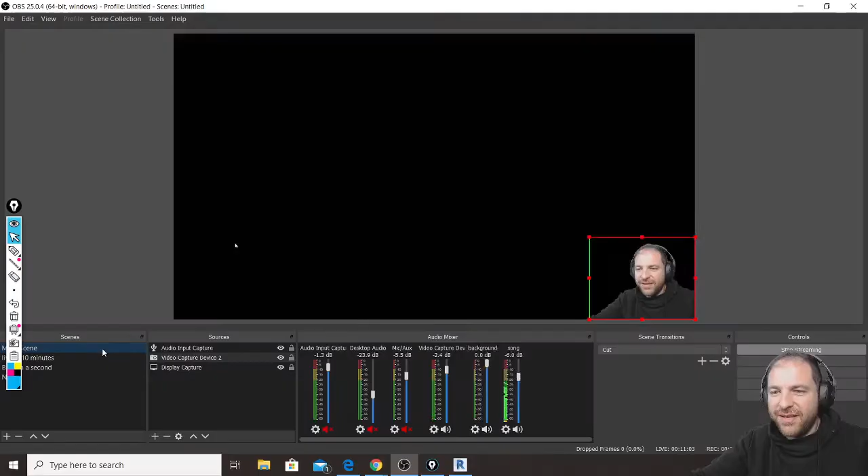Here I am. Let me see what you are telling about my new intro. Ooh, I completely forgot. No, I'm so sorry, Abhishek. At the end of the class, I will check your video. I completely forgot. I'm so sorry.

Cool, isn't it? Yes, I'm stepping up the live streaming thing, because I like it. I just like to play with these things. Also, someone said that other teachers were copying me with the good morning to everyone, and using also the live in 10 minutes. So I want to step up the competition, because then someone could say, "Look, Marco makes live in 10 minutes like other teachers." No. I have to be always a step forward.

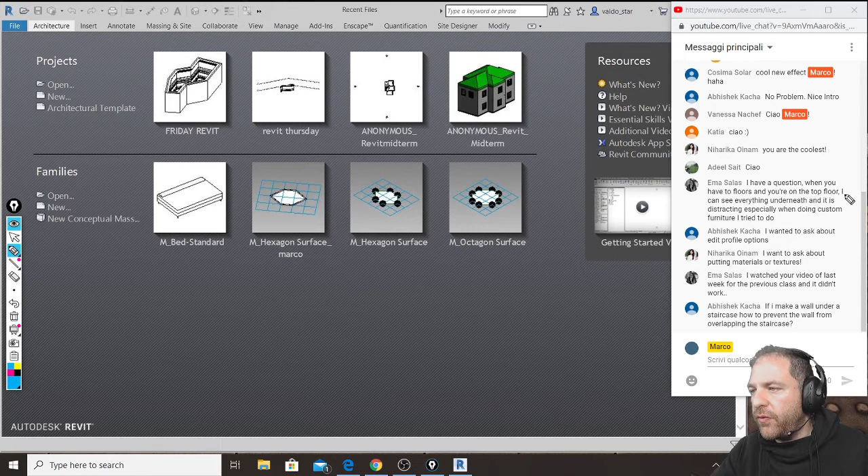When I have two floors and I'm on the top floor, I can see everything underneath and it is distracting. Okay, let's fix it. Let's open something that already has two floors to see why this is happening and how to fix this problem. Yes, it is about underlay.

So look here. When I go to level 1, the lower floor, and I go to hidden line, it is clearly visible that underneath this level there is nothing, because this is already the lower one. When I move my point of view to my upper level, level 2, in this case I can see these grayish lines that are telling me what is below.

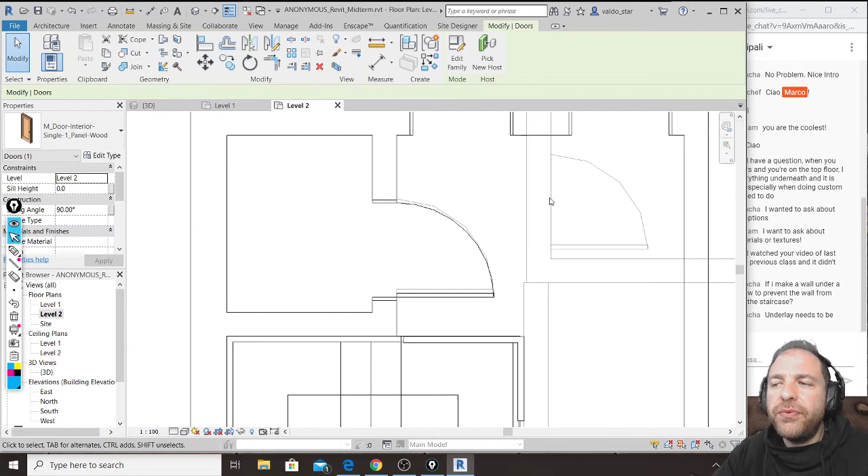This may be distracting. These should be used only to understand if you are precise in making your ground and your upper floor. This is anonymous; I changed the name because this was a midterm of one of your classmates, and you can see it is terribly wrong because a lot of things are not matching. But it is confusing, because in my upper floor there are not these walls, so I don't need to see them.

How to fix this problem is very simple. I have to be in the level where I don't want to see these things. I click outside, so I'm not selecting anything, and in the properties I see the properties of the floor plan view. I browse properties till I see underlay, and here underlay is level 1, so from level 2 I can see level 1. To avoid viewing what is underneath, I select base, I click none, and I click apply.

Boom! All those elements that were visible before are hidden, and you see only elements on your current level. When you want to show them again, you click level 1, look down, apply, and you see this. So I can use this to fix my door so that it perfectly matches in both levels. I click move till here, fantastic. Then underlay, none, apply, boom, it's gone.

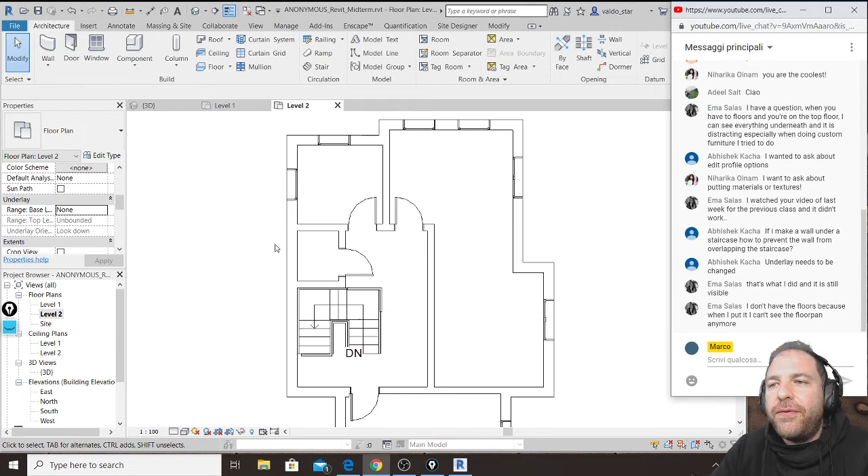But if you don't put the floor, you can change whatever you want in the underlay, but you will see things that are underneath because they are underneath. So what it means is that, look, if I make something here on level 1 and they are geometrically there, when I go to level 2, of course I will see these because they are there.

Come on. Hey, oops, exactly.

So, the underlay works when the structure is correctly done. When you have the floor that technically will cover this element, with underlay you can enable viewing in transparency, or disable it. But if there is no obstacle in between, there is no way to hide them. Okay? So this question is fixed.

Let's read them again. I want to ask you about edit profile, Abhishek. Then it says, if I make a wall under a staircase, how to prevent the wall from overlapping? No problem, Ema. How to prevent the wall from overlapping? This is an interesting question. So there are things that you can do.

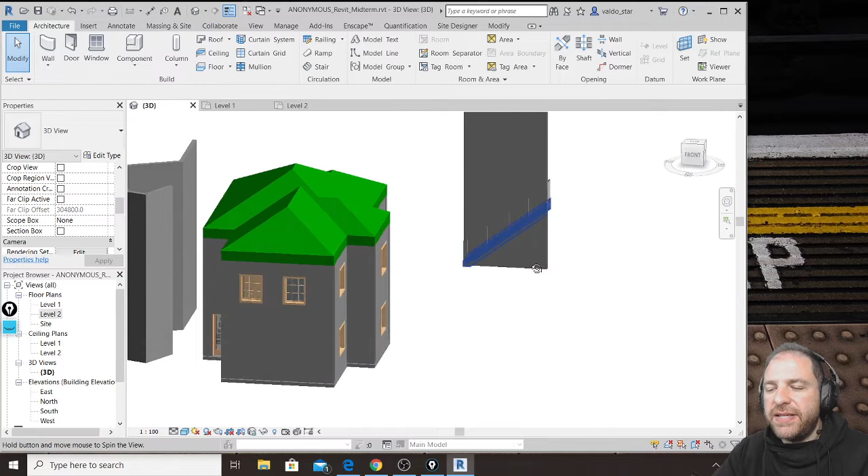So let's see this. Let's say I make a stair. I make this one. Perfect. And then if I go in here, let's say there is a wall in here. Like that. Perfect. And if I go in 3D, I will see that the wall and the stairs are clearly overlapping.

So first thing that I need to try is, this is an open structure staircase. So first thing, I will change the stair from assembled stair to something that is closed, like a precast or a monolithic stair. And this is the first thing that I can do.

Second thing that I can do, this is a try first, is I can click the wall, I can click attach top/base, I need to attach the top, and I need to see if Revit accepts the stair as an element that will shape my wall, and as you can see it doesn't, because when I click attach top/base, Revit will look only for floors or, how can I say, roof objects.

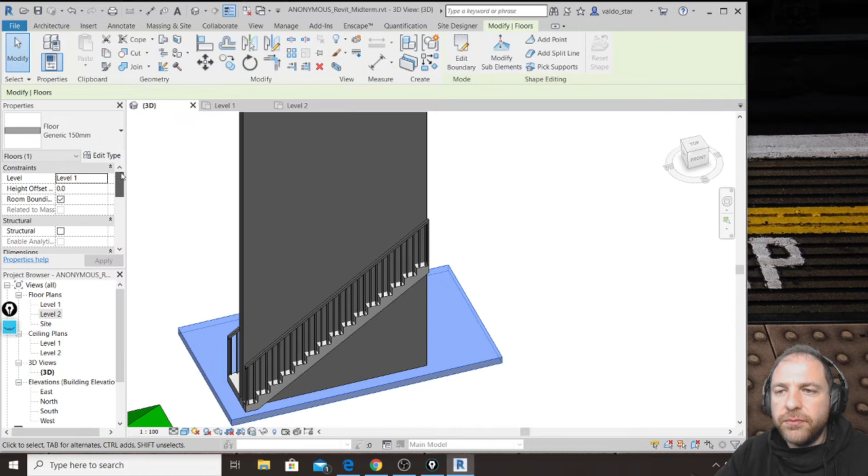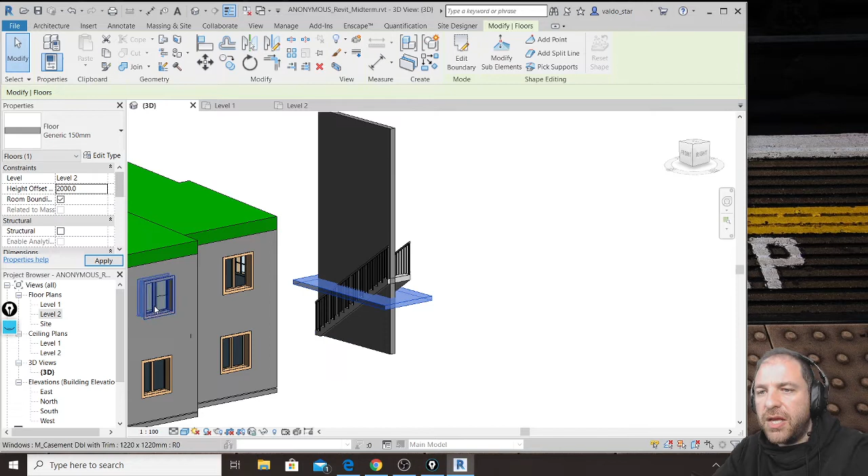Oh, wait a second. I mean, if I go here and I make a floor, just to show you, perfect. But in 3D, I will move this thing up, into the height offset. Let's say I type 2000, and it goes up. Then yes, I can select the wall, click attach top/base, and I can select this. So this is what we need to do.

We need to be able to create a cutting object that in this case should be a floor or a roof, but it has to be a cutting object that, wait a second, one by one, that matches the shape of the stairs.

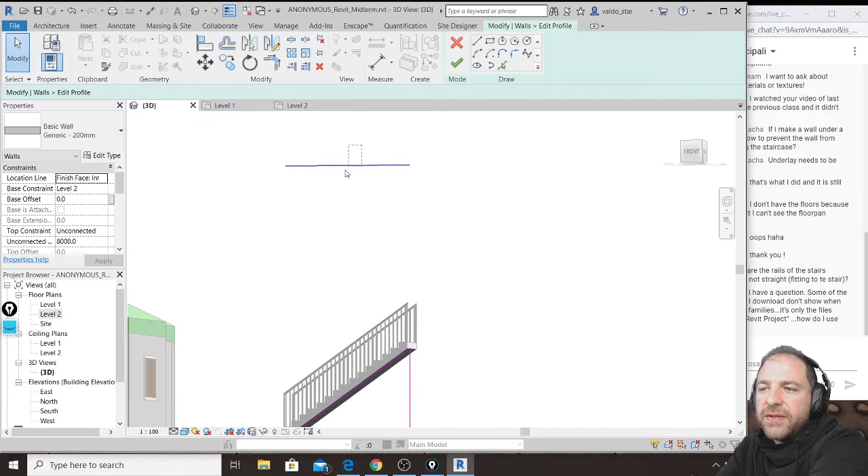Because if I am lazy, I can tell you, look, only if the staircase is just a simple ramp like that, without bothering with many other tools, you could select the wall, select edit profile, pick this line of your staircase and change the profile of your wall, cutting it like that, delete these extra lines, so you make a triangular wall, you click OK, and this is easy.

But if I explain this, I know for sure that someone will say, but Marco, what if my stairs is more complex? Okay, this is too easy. Let's see if I can show you something more complex. And then I will read Katia and Adil's questions. Let me finish this one. If my staircase is a little bit more complex, I can try to do something else.

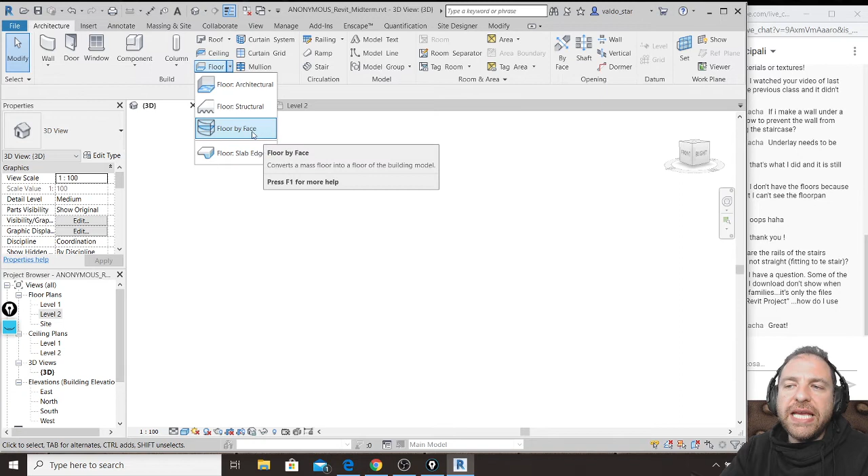If I know that a wall is cut by a floor or by a roof, I need also to know that the wall can be also cut by another wall in a slightly more complex way. That is this. Look. First of all, I can make a floor by face also. Technically, floor and roof can be made by face. So what this means is that if I have my stairs, let's make the stairs.

Wait a second. Let's go to level 1. Exactly. And let's make my stairs that are here. So I have this and then this. And I click OK. Again, the only thing that I will do is I will make these like monolithic stairs. So I change them from precast, I mean, just to have monolithic. That is here. Exactly. So that the structure is continuous.

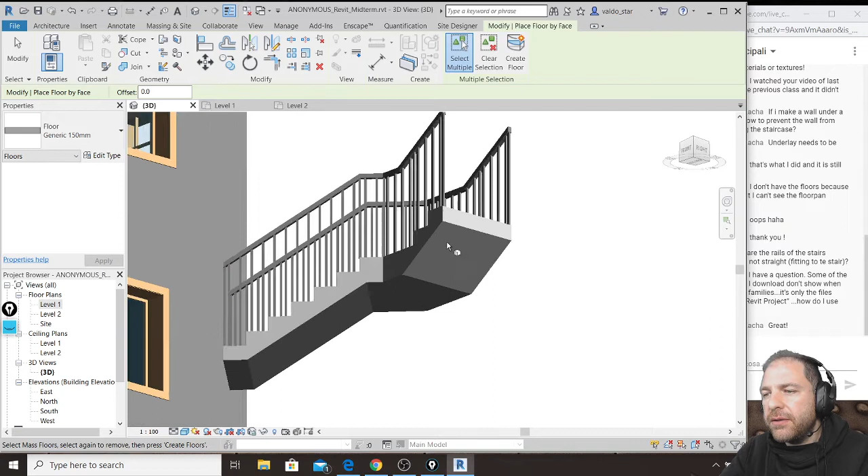What I can do is technically this. I can select floor. I can select floor by face. And I will pick, let's see if it allows me, I will pick this face. No, it doesn't. So I will use roof by face because the roof can be angled. Okay, multiple select. So I will pick. Why? I was too fast. Why it doesn't? Doesn't matter. Let's find the way that works for sure. So,

I want a wall that will be cut underneath this staircase. So look what I will do. I make a component and I make a component in place. Or first I make the roof, just to let you understand what we are going to do. So I have the wall in here. Perfect. And this will be impossible to be made with the technique that I showed you before. I mean, not impossible, but a little bit more annoying, because in here, in there, it will take forever. So, see this phenomenal thing.

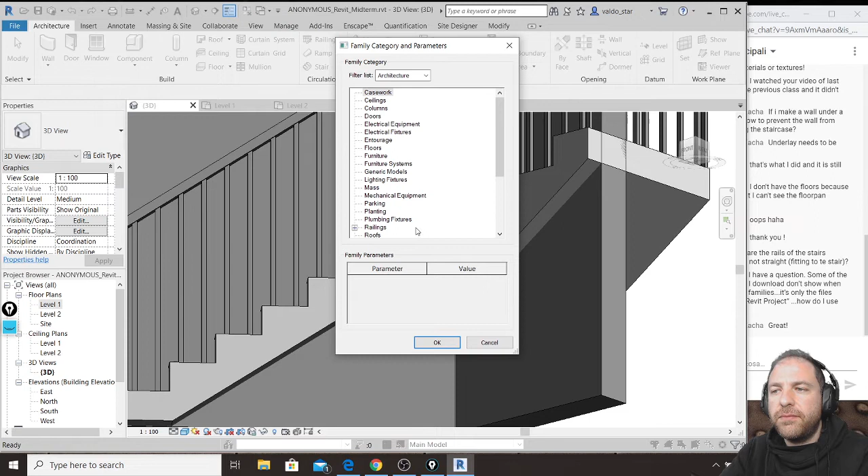What I have to do instead is I will make a component, and I will make a component in place. And it will be a wall. Okay, wall 1. And I will make a shape that is the projection of the profile that I want to cut. So, even if this is angled, what I will do is I will make a reference plane in here. And I will call it whatever name, like Marco. Okay. Then I go to create, but I will create a void extrusion. I will set my working plane as the plane that is called Marco.

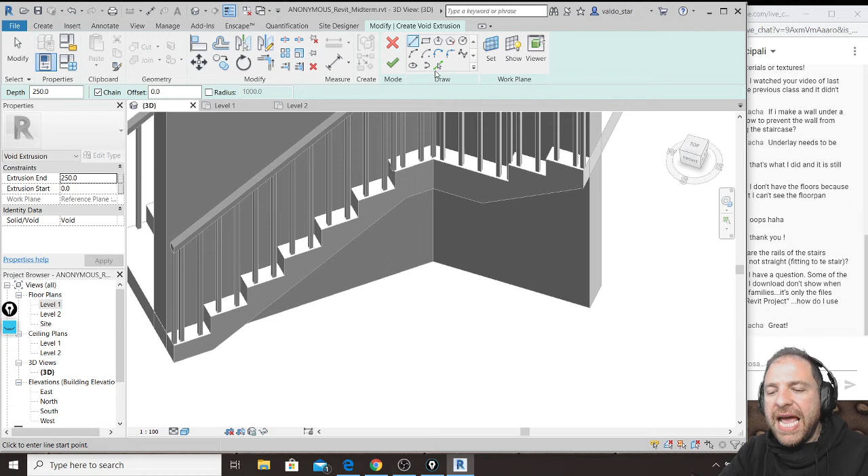Okay, I will go to the 3D view and I will start drawing a shape by projecting these lines that are edges of my staircase. Maybe this one too. Yes, they overlap. It's okay. So I will start from this shape here, but I will make it better. I will make it continuous. So I will trim these with that. And I will remove these overlapping lines, because if not, Revit won't leave me alone.

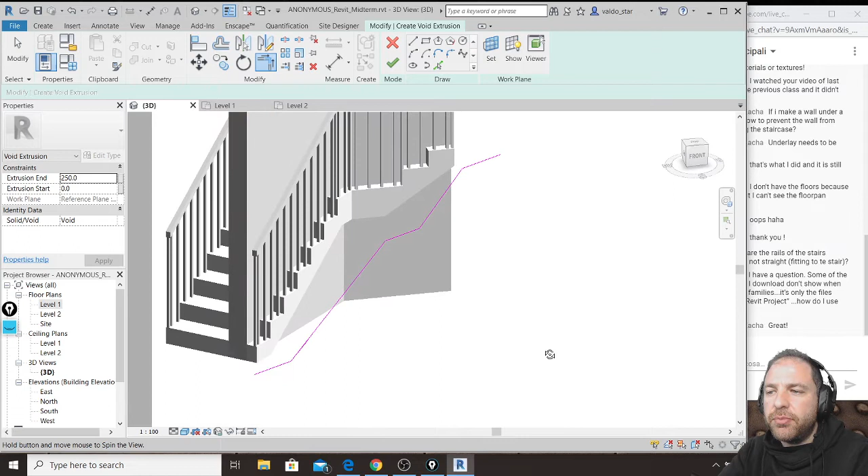Okay. I will trim these with these, this with this with that. I remove this one because it's a duplicate, and I will trim this with this. So I have the lower profile of my beautiful staircase projected here. I will simply complete this shape by making it taller, because this wall is gigantic, like that. Perfect. And I will close this.

I will finish my void extrusion. Lines cannot intersect. Where are they intersecting? Ooh, there is a line there. Yes, this is my fault, sorry. So again. Okay, so finish these. I will extrude this void extrusion so that the void extrusion is thicker than the entire wall, but I get this cut.

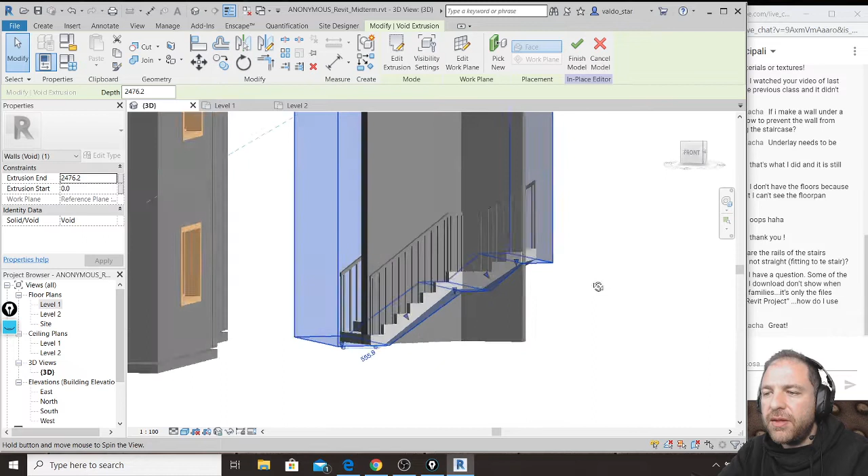And before finishing this operation, so before clicking finish model, what I do is I click into my modify, I click cut, I select first the wall that I want to keep, so these, cut these, and then this. Boom. Oh, I forgot. I should make a copy. Wait. Because there are two walls that I want to cut, but you have already seen the surprise. So I just copy these twice, because I want to cut both walls.

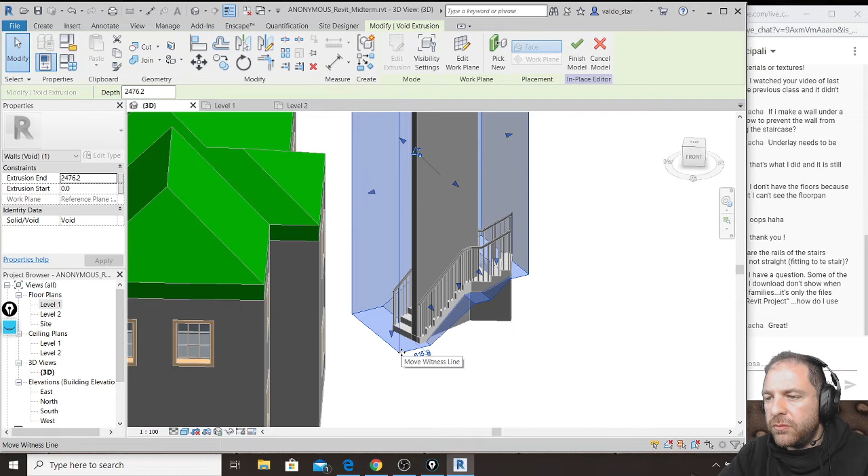So I set a working plane, level 1, set level 1 exactly, and I copy this. Okay, I should copy with a known value, so that then I will move it back. So I click cut, select first wall and first void extrusion. Then I move these back where it was. Was probably here. And then I click cut, select the wall that I want to keep, and I subtract it with this solid, and boom!

I finish the model and I have this phenomenal result that I have the wall cut in order to stay perfectly underneath the staircase. So it's basically like in 3ds Max we would have used ProBoolean, and we have used like subtraction with ProBoolean. Okay?

Oh, thank you so much. So

Let's see this. Why are the rails of the stairs sometimes not straight? This is very complex. It requires me to think about it. So let's see. I have a question. Some of the blocks that are downloaded don't show when I'm loading a family.

Okay, let's see this. First of all, when you download objects, you need to understand which category of objects you are downloading, because when you download, let's say, an object that is a Revit family, that Revit family can be different things. What it means: if you download a family that is about furniture, you will be able to load it only if you go to Architecture, Component, and you click Load Family from here.

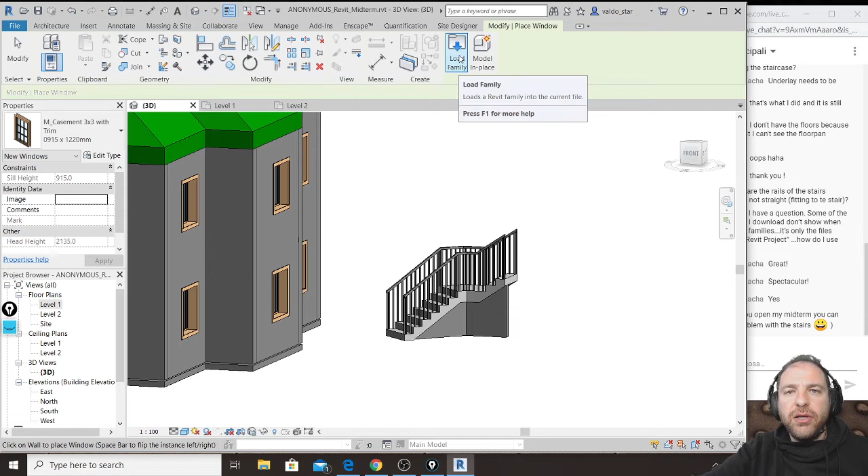But if you have downloaded a family and the family is about a window, you must select Window first and then click Load Family. Because if not, even if you have just downloaded it, if your family is about a window, you can't load it from Component, or if you have downloaded a door or stuff like that. So first of all, check which kind of family you have downloaded, and if instead it says it's only Autodesk Revit Project, it means that you have downloaded an entire project that is not a family.

So it is a project like this, and if you need to use a component from a project, you have to double click on it so that you open just that component. You go to File, you save as your family and not the project. So just this family, in this case it is a window. Okay. And you will save just this window as RFA, that is Revit family and not Revit project. So then you can use just this component inside another project. Okay? And this was for Adeel's question.

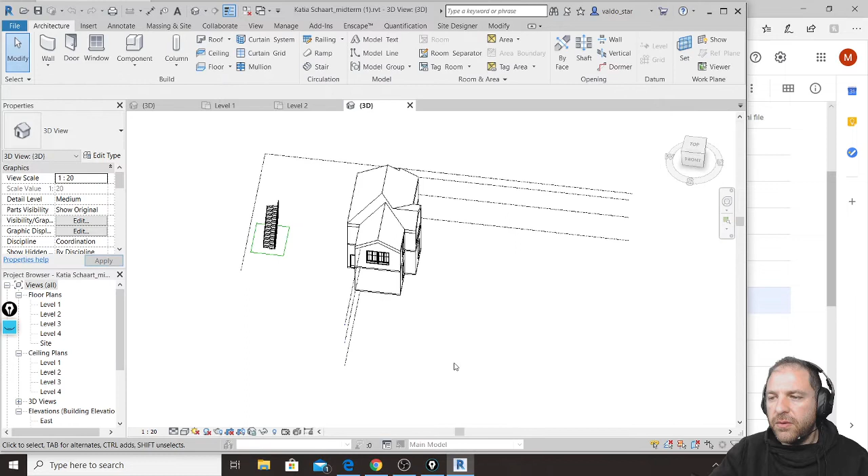So Katia gives us the permission to open her phenomenal Revit midterm. So Katia, download. Let's see. Okay, so let's go to level 1. Why do you say that your rails are not straight? Where? They look perfect. If you open my midterm, you can see the problem with stairs. I am opening your midterm. The one in the green square in the 3D. So the 3D.

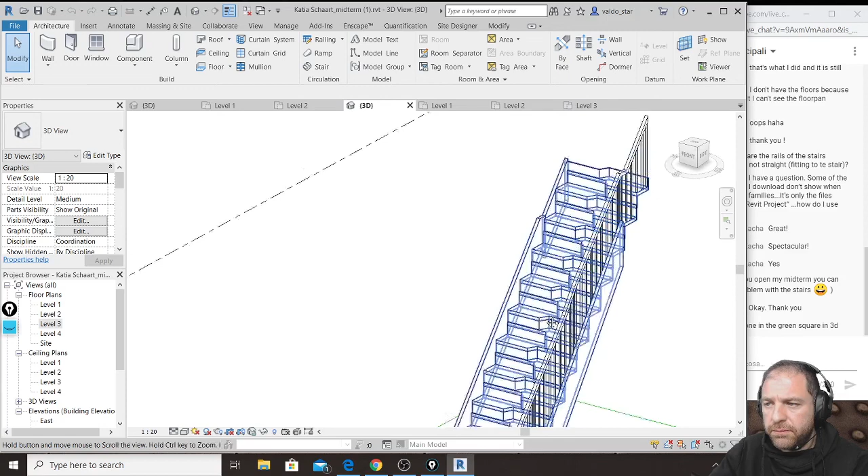You probably mean this part here. Why is this not linear and with this particular broken shape? Is this it? I don't know, I have to see. I don't know why it's like that. Let me check. So let's delete the railing first. Yes, but I can see that it is broken here. So let me double click the stair. Edit the sketch. Go to level 1. No, level 1 here. And understand what is happening here.

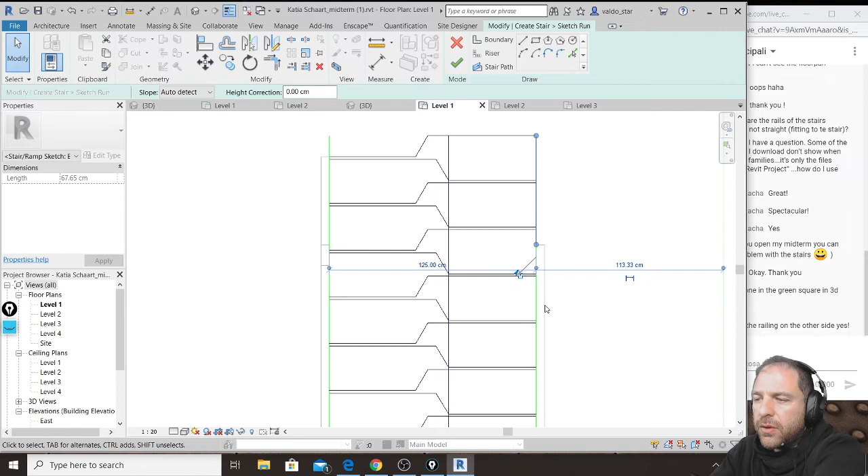So, the question is, why have you made the boundaries of the stairs with these separate lines instead of making them with one continuous line? As you can see, the boundaries of your stair are this green line. Okay? So sorry if this hurts, but I will make these with one continuous line. Okay, let's see if it fixes. No way! Now I go to 3D. Woohoo! And everything works. Unbelievable, isn't it? Marco 1, Revit 0.

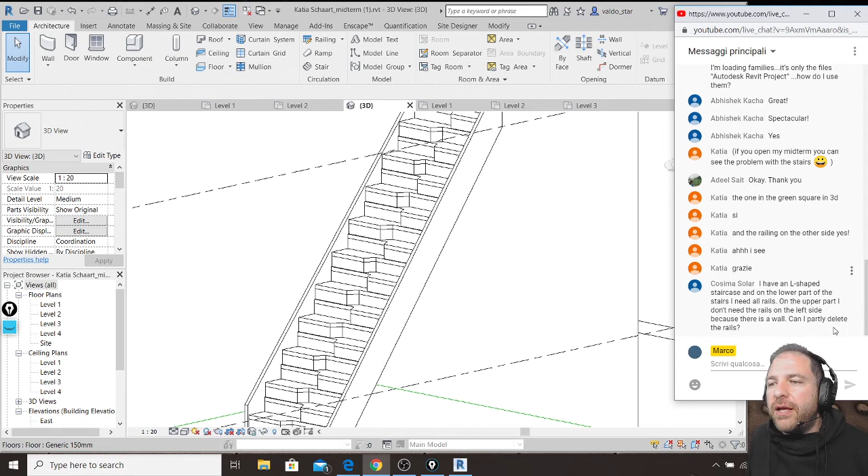I mean, this is challenging. Like, you wake up one morning with an idea in your mind to make a class, and then questions are drifting in completely unexpected directions.

So, let me see. I have an L-shaped staircase. On the lower part of the stairs I need all rails. On the upper part, I don't need the rails on the left side because there is a wall. Can I partly... okay. So, first of all, let me close these, because if not, people will say, Marco, fixing files and whatever. So, let's start from a new one, just an architectural template. So, your classmate is asking this.

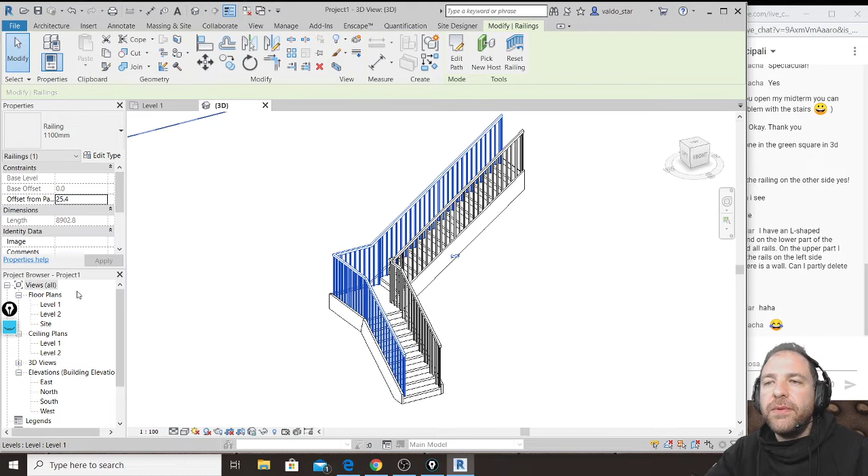She has an L-shaped stair, so something that should look, let's say, like this. And when we create this staircase, it happens that by default the railing is placed all along the host, that is our staircase. And if we try to delete this one, we will delete the entire rail, while your classmate is saying, wait, in here I'm going to have a wall. So probably like this.

So let's say here I have my building that looks like this. So I need railings here till there, and then I just want to remove this part that is matching the position of the wall. First of all, is this the problem that you have? Let's see the answer. So we want to get rid of it. Perfect. So let's see how to fix it. It's not that hard. Way number one, let's see if it works in one click. I mean, this is an experiment in real time.

You can try to click Split Element, split it here, and then boom, it's done. And so sorry, was this fast? You want to see it again? Because I mean, it was too cool.

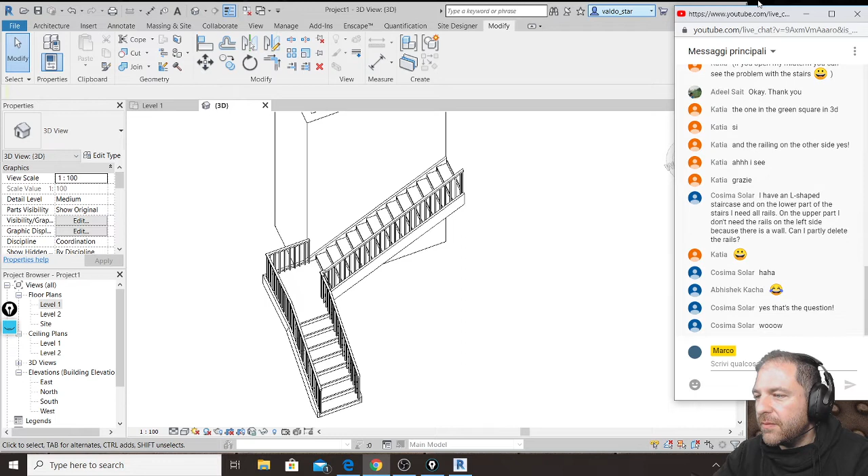I know, and it's beautiful.

So technically what I have done is simply use split, that tiny tool in here. When you have a continuous object, in general you break the continuity of this object, and this is a lot more useful than we think. For example, even when we just make lines, so I'm just drawing lines, and I make a rectangle.

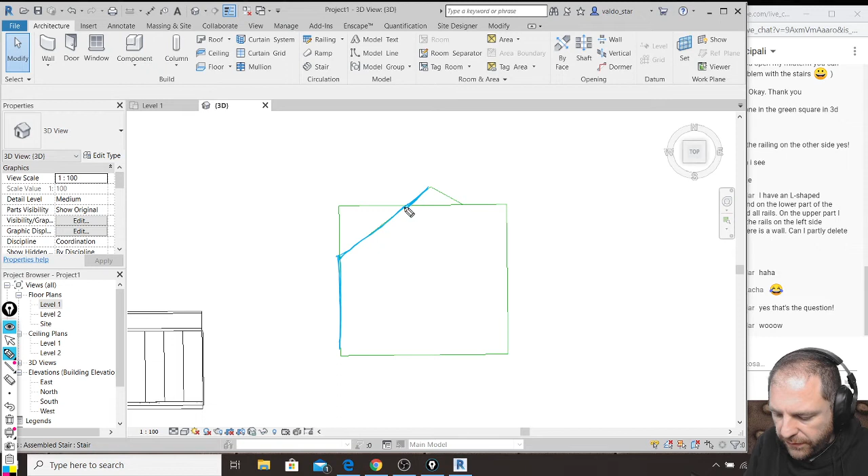If I want to do this, so in AutoCAD it is very simple, let me sketch on top of these. In AutoCAD, if I make these two overlapping shapes, then it takes one second by using trim to turn this shape into something, let's say, like this. Or not even, no, sorry, into something that is like that. Because in AutoCAD you select trim, you trim these, and you are done.

In Revit it looks like it takes forever, because if you use modify and you use trim, since this is one line, if I trim this with that, it trims those elements. But in reality, I wanted to keep this part in here, while I wanted to delete this part of the lower one. So look why split is so useful.

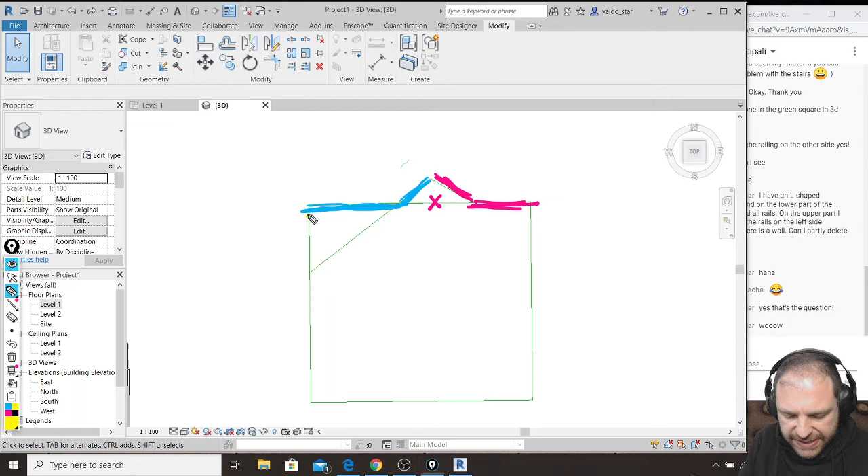Because in reality, in here, I will use two colors to let you understand, we want to make this part trim with that, and we want this trim with these. What I have to use to make my life easier is I have to split this continuous line. By using split, I will tell Revit that even if it was one continuous object, with split you need to treat these as two independent elements. It's like adding a vertex along our shape. So I click split first, so that I add that vertex, and then I can trim this with that, this with this. Okay? This is exactly the same thing that I have done into the railing.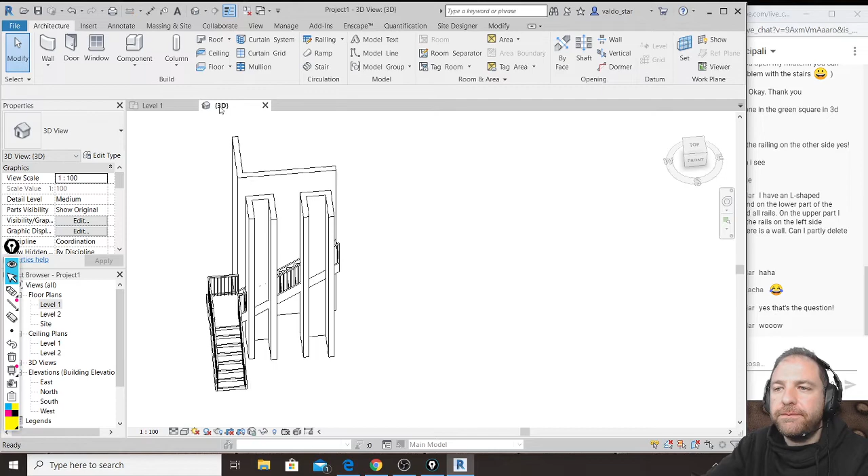So, if in my project, look, even if it would be a little bit weird, but if for some reason I have walls that are going like that, and the railing is overlapping those walls, the result is terrifying, I will say. What I have to do is only select my railing, split it, and split it in each point where I want to break its continuity. I can even split in more points, but in this way, boom, I will just remove certain parts. It worked. Perfect, I am super happy.

Yes, it's okay. So, one of the things I wanted to show you today is something I have already shown you from the question of your classmate. I wanted to show you that in Revit you can not only use join when elements are not perfectly combined together, but you can also use cut. The thing is that by using cut you need to make void shapes, and this is pretty interesting, and believe it or not, it is sometimes a lot more useful than you may think. I want to show you one particular case, an example of using cut in practice.

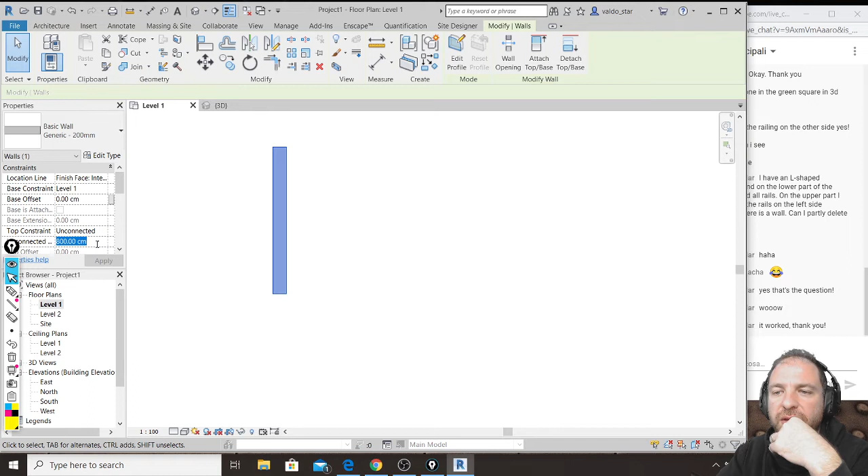So not just weird things or just the wall underneath the stair, but sometimes we may experience this. Look, I make my wall, and sorry, I forgot, sometimes I would change it, but I just like to work in centimeters for no reason, I just don't like all those numbers when you work in millimeters. Okay, and this would be like 800 centimeters tall, just a wall. And I want to place a very common window, so I will put my window here.

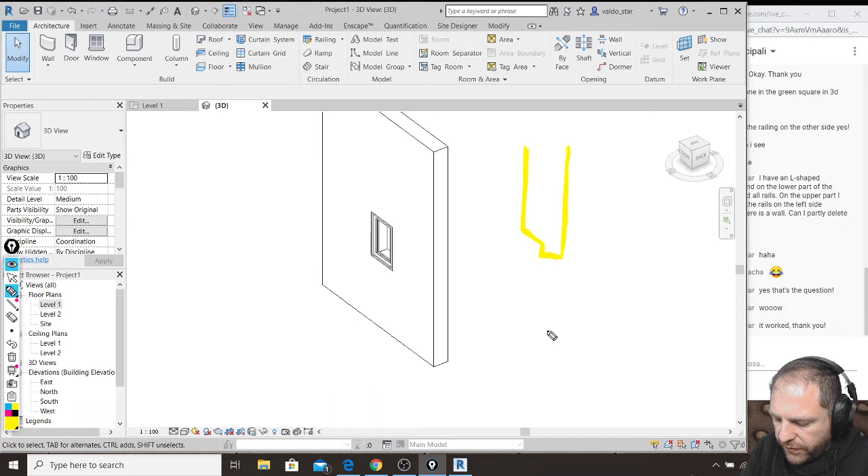I am super happy with the result, but then I can see something that I honestly don't like. This window is placed in a way that the hole in my wall is rectangular. Especially in Italy, I would say, but I don't think only in Italy, in old buildings it happens a lot of times that when you make a floor plan of a house, you may notice that the wall is not continuously thick, but the wall makes this first, and then you have your window here. Like this. Okay?

And the thing that I have instead now in Revit is I have my wall, and by using that window, the result is that I have something like this. I have this huge, deep frame, and the frame then has this tiny window here, and I am having this. Sometimes this is not what we want, and we need to create this particularly shaped wall. So how to do this? This is not that simple, unless you know that, as I showed you before, you can make basically pro-Boolean operations with your Revit just by using component in place.

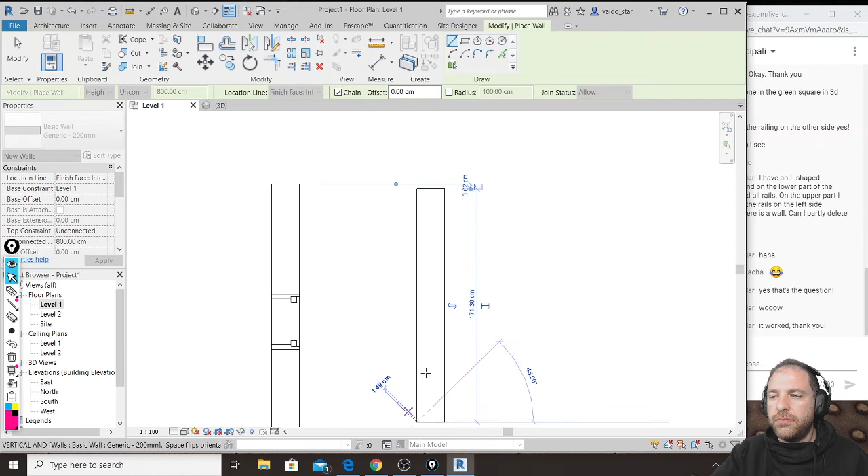So, if you have that specific problem, you should start in this way. That is, you make a wall, and then you go to Architecture, Component, Model in Place, and you click Wall, and you click OK. You call it as you wish, and then there are multiple ways to do it. Technically, a more precise way will be by using blend. So look, I make a plane, let's say here, and I will call this middle.

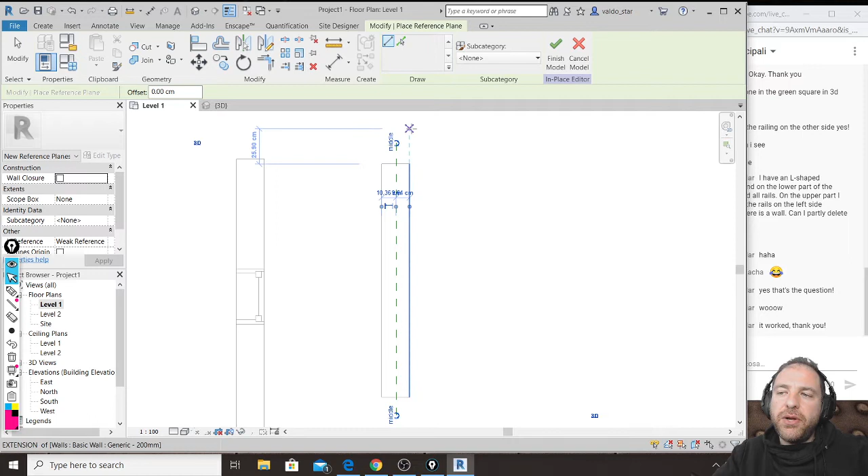You may ask why I'm not also creating a plane in front of the face. It's because of another new thing I want to show you today: when you have planar faces, you can pick those existing planar faces to draw on.

So if I go to my 3D view, I can immediately go to Create, go to Blend, and as a first face I click Set. Instead of choosing a plane by name, I can pick a plane, click OK, and pick this existing planar face to draw a rectangle.

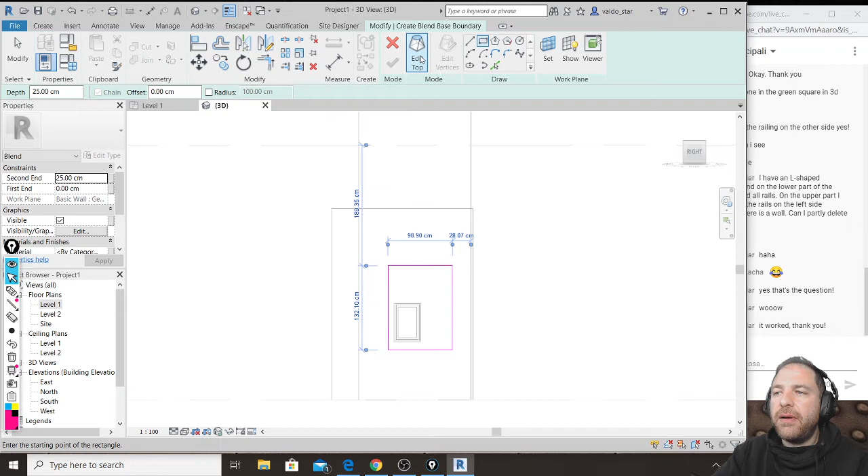Then I'll draw another shape, but I want to see it in transparency, so I go to wireframe. When I click edit the top, I set that my next plane must be the one I've called the middle one. As a second shape, I simply draw another rectangle like this.

I can also start both rectangles from the ground, which would be even more realistic. So I go back to the base, and now I have these two rectangles, one into the face of the wall, one in the middle.

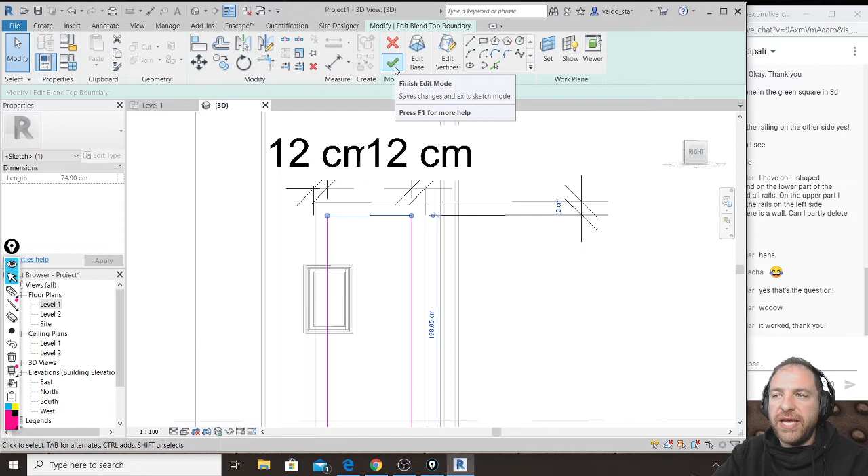If you want, you can be more precise when you make these shapes, so they're equally spaced. Set the distance here, let's say 12. The distance here is 13, so you click it and make it 12. You click this one and it's already 12. You can also do this from the top, select these and make it 12, so there's a perfect equal space in between. Then click OK, and this is the shape you've created.

These must go in the opposite direction. It has to go inside the wall.

Before closing my model, I'll click Cut. I select the wall first, and this second element. Wait, don't tell me I haven't clicked void. Sorry, this is my bad. I've explained it before, I have to make a void blend like I made a void extrusion before. This is 100% my fault, so forget what I said, but I'll do the same thing.

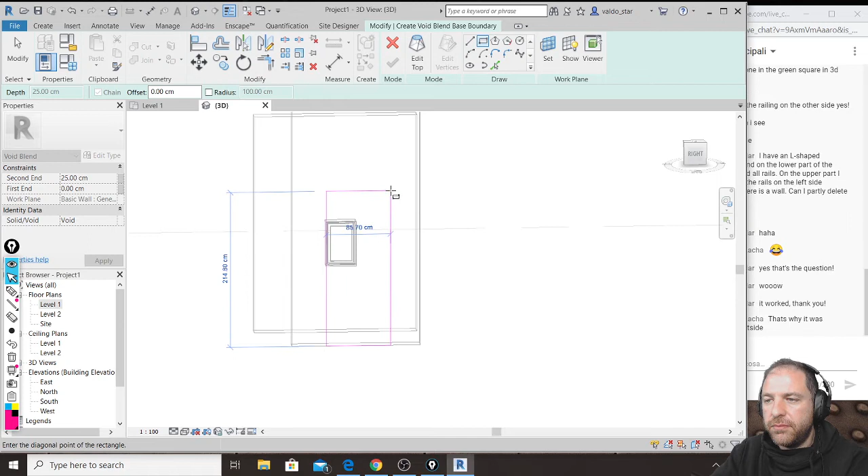So I click edit the top, and set to pick a plane. Sorry, I haven't clicked void. And I make a rectangle. Exactly, I'm so sorry, I haven't clicked void, it's 100% my fault. Then I click edit the top, set as the middle plane, and make my second rectangle. What a basic mistake.

Again, if you want, you can be a bit more precise. I set these to 12, this to 12, this to 12. Click finish, and this will be a void blend that has to go to my plane here.

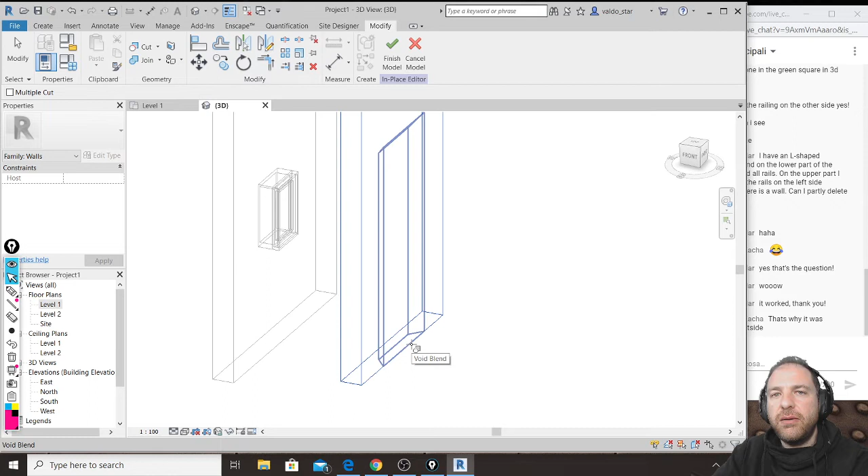Now I can click cut, and I select the wall first and my void blend, then yes. I can finish the model, and go back to my hidden line view, and bim, bada boom, I have basically carved the wall in this way.

Then I can add windows. I can even edit the profile of my wall, and place a rectangle here that would be perfect like that. Edit the profile, making it a little bit taller, and I can really start by creating whatever I want in Revit, not limited to objects I find in my library, but free to model elements exactly as I need.

Just to show you, you can also combine objects together by using join, something we've seen in the section where the floor and wall overlap each other. You make join and fuse them together. But you can also use cut, though that only works if your objects are hollow or void forms, so they must be made like void shapes.

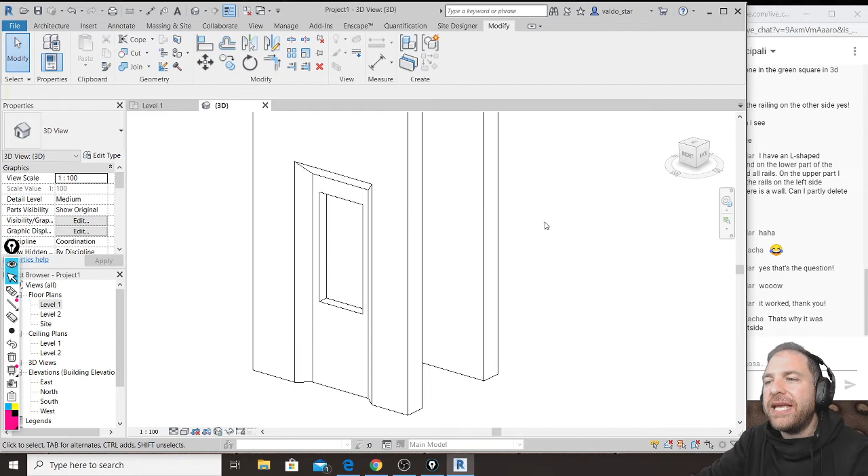That was the first thing I wanted to show you today. But there's something more interesting I want to show you that is still about modeling in place. When you make models, you need to understand that modeling in place is perfect when you make a component that you know you will use only in that particular file.

Because if I make this void thing here, or if I draw a table using a model in place, then I can't use it, I can't load it into another file.

So, where is the deal? What you can do by using the same tools, just starting from a slightly different point of view, will be this.

In Revit, look, just to show you again, when you click Model in Place, can you see that you can create all of these kinds of objects? You can make ceilings, columns, doors, electrical, floors, furniture, generic mass, mechanical, planting, blah blah blah. But they will stay in this particular project.

But see this unbelievable thing. When you go to File and click New, in Revit you can click Make a New Family. What is this? It's very simple, and if you make a new family, you need to start from a template, and the template will be a family template.

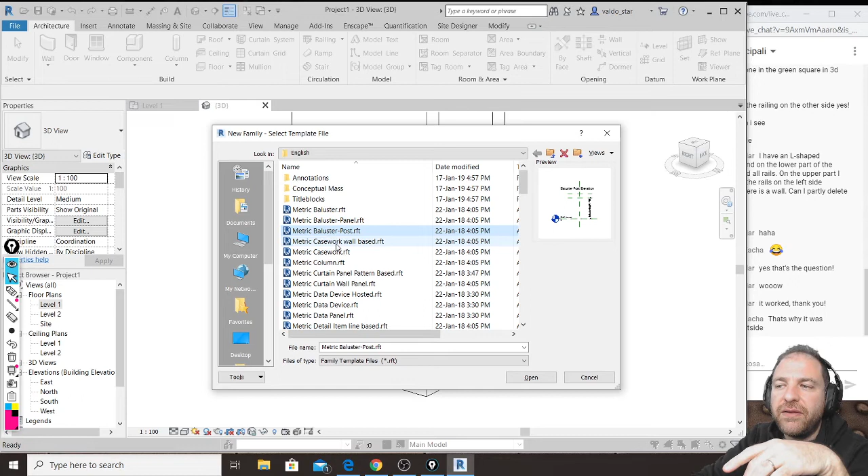So you can see that you basically find the same exact names, so you can create columns, curtain wall, doors for curtain wall. You can make even more things, because here there are also construction and systems templates. But if I want to make furniture, I will start my template as metric furniture.

If I want to make a roof, I will select... if I find it, there should be roof somewhere, I don't know where. Here, roof: model roof based, floor based, wall based, or just a generic model that is not in a particular category. But let's say I want to make a furniture.

So I start by making a new family with furniture template. But why? Simply because if I start in this way, I will start a completely new independent file.

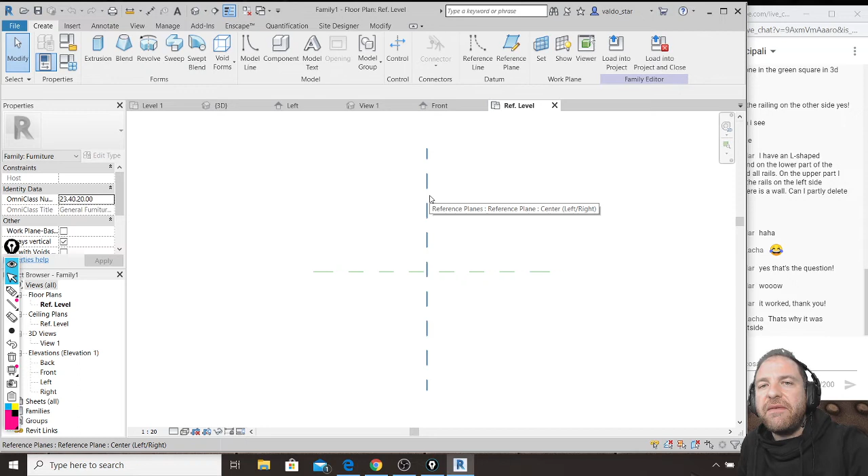This file will basically start by having only 3 planes, that are this one, and now we are on that, but there is also this one. So basically this is an empty file that starts by having top, front, and left plane, and I can not only, as you can see, reuse the same exact tools that I was using in Model in Place.

But the very big difference in starting a new family is that when I finish, I won't simply keep this model in a certain project, but when I save this family, I will save it as a file. I can place it in my library folder, and I can load it from whatever project I am creating.

So let's say I will do something that would be unbelievable. That is, I want to make a very basic table. But not only do I want to make a table, I want to make something more complex. That is, I want to make it parametric. And this will blow your mind.

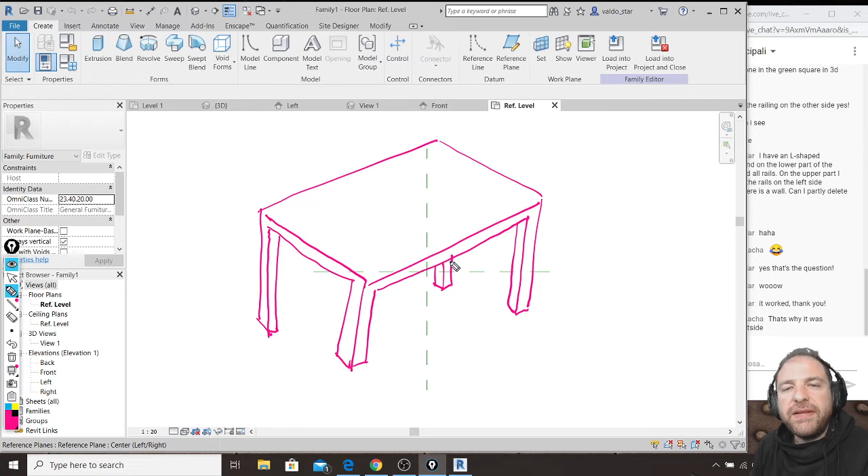But there is a twist in here. That is, I don't want to make one table. That would be too boring. I want to make a family of tables, so that I will have the possibility of choosing inside the project that I can have the table.

That would be a square, or the table that would be super long, or the one that would be shorter, and so on and so on.

So I want to make one file where I find a family, a family of tables. And the concept that is behind this, I hope we will finish it today. If not, there is time. The concept is basically this.

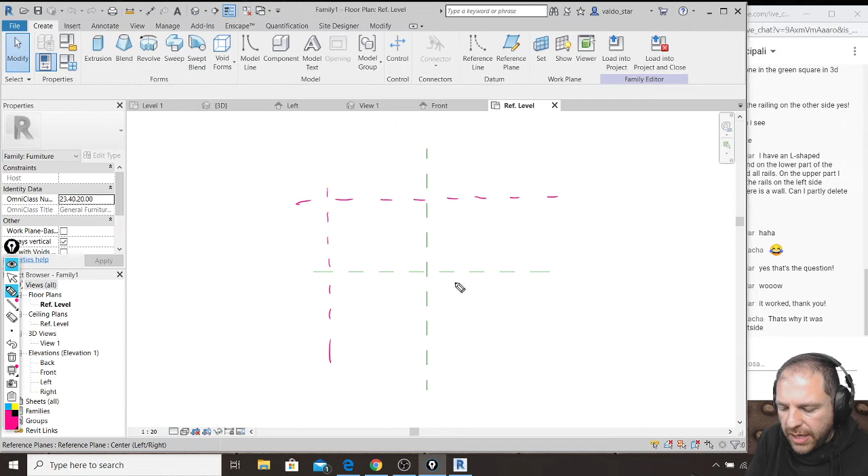Instead of just drawing and modeling our object, what we have to do is create a structure of reference planes, and we will give dimensions to our planes, and we will say that this won't be a dimension, but this would be a parameter, and let's say we will call this length, and we will call this width.

And then we will say that the table we draw must have edges stuck to these planes. So in this way, when we move our planes, in reality, we will stretch the table. So this is the concept behind making a parametric furniture.

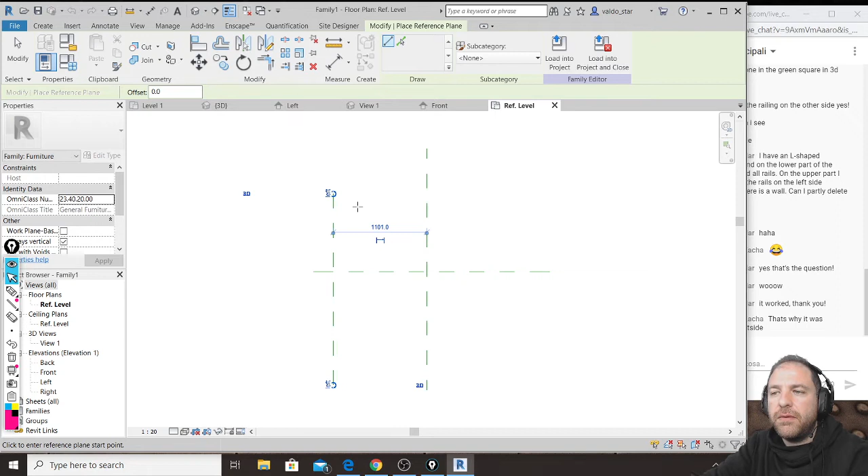So look, I will simply start by making this plane, and I will call it left. I will make this plane, and I will call it probably right. I will make this one, and I will call it back.

I will make this one, and I will start by calling it front. This is the center, and so on and so on. So what I will do next is I will use aligned dimension to be sure that the axis that is into the center is there.

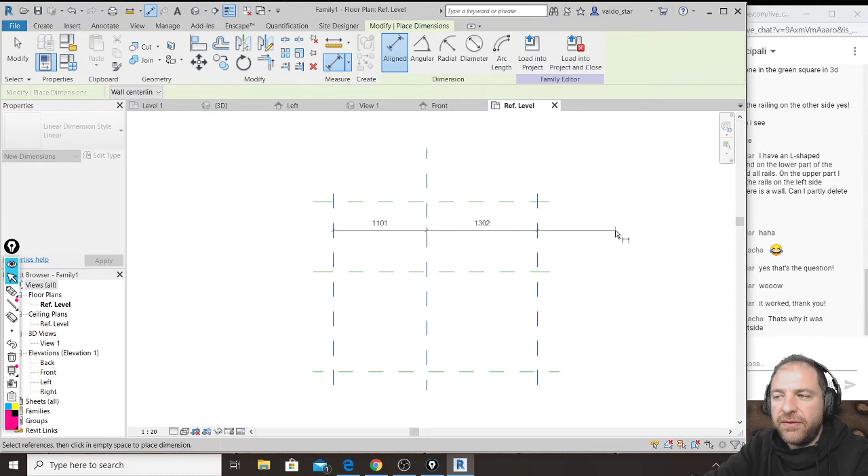So I measure. I measure from my left to the center to the right, and I click outside. And I will simply set that they must be equal. In this way, when I move one of them, they will both move closer or further from the center.

I will do same thing for the front and the back. So I use aligned dimension: back, center, front, outside, and I click equal. So then again, in this way, when this parameter will change, both sides will keep the center where it is, but both sides will be stretched. Okay?

I have almost done. I need then to add instead another dimension so that I measure directly from left to right. And this will be my length. From back to the front, this will be the width.

Okay? And I will do something phenomenal, that is, I will select my dimension and, by selecting the dimension, I will click here when it appears label, and I click create parameter next to label. And I will call this parameter with the name that I want. So for me, we said this is length. Okay?

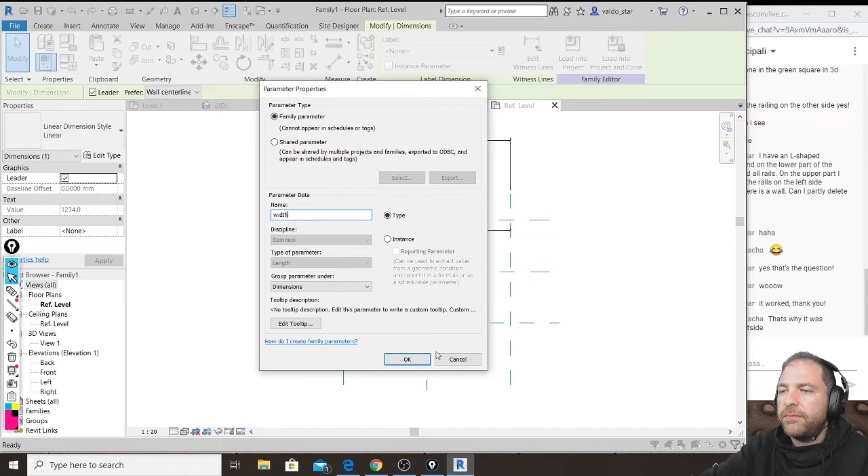Till here? Yes? No? Maybe? Tell me if also here...

I've made the mistake because I called it length while no. And how can I modify it now? What is here? Give me a second because I need to find where is the name of my parameter. Here. It's called length. No. Here. Edit parameter. Exactly. Sorry. Length. Okay, sorry, this was my bad.

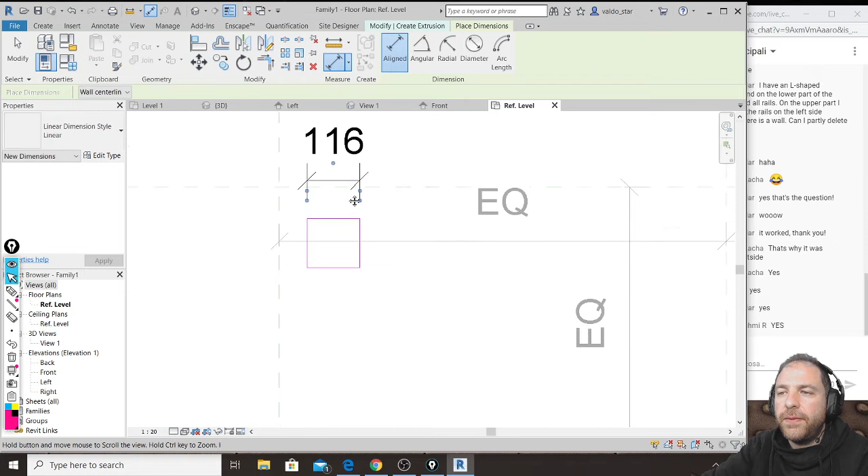So now this is just the beginning. And now we have to see something unreal. Look, I will quickly start by creating an extrusion. And I will make the extrusion by making a rectangle. And I will start by adding dimensions to this. So I will say from here to here. Units are millimeters again.

Yes. So I will say that this will be 100. Perfect. But then I will lock it. Then I will do the same in here. I select these, change the number, 100, perfect, select it, lock it. In this way, these will never change size, but I will do something even more phenomenal.

That is, now I will copy, or I can mirror it. I mean, it's the same. And I will make multiple copies. I will copy one here, one here, one there, so that I have 4 legs of my table. And what I want is that when I change my size of the table, of course legs must follow the adjustments.

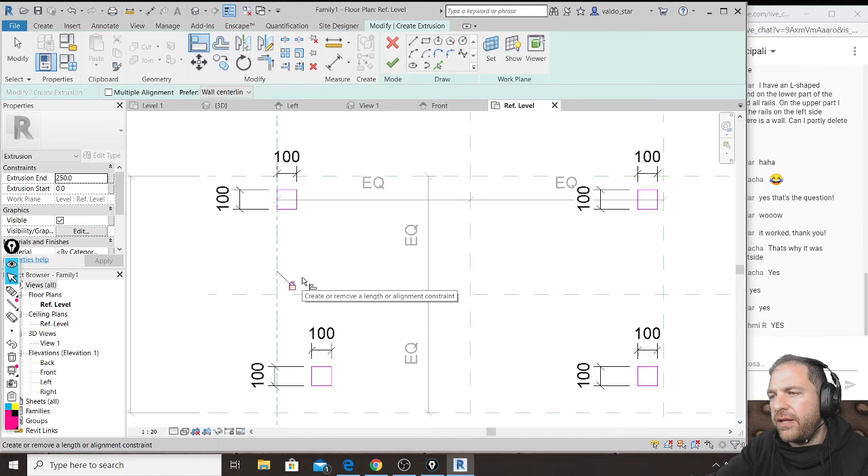So what I will do is, see, because this is too cool, I click Align and I will select the plane first and the face of the leg, and I will lock this alignment. And it is tedious, I mean, it is a bit repetitive, but if you do it right, it is amazing. I keep aligning this plane with this face, and I lock this alignment.

And I repeat this for all exterior faces of the drawing of table legs. So align first the plane, then the line, lock it. Align first the plane, then the drawing, lock it. Align first the plane, the leg, lock it. Plane, leg, lock, plane, leg, lock, plane, leg, lock.

Then I can click OK, and I can give the height that I want for table legs, let's say 700 millimeters, apply. And if I go in 3D, I will see this. I have these 4 legs, but if I go back to my reference level, so the view from the top, I will see that if I drag these, all 4 legs will move together, and they will remain stuck to those planes that I have created as reference.

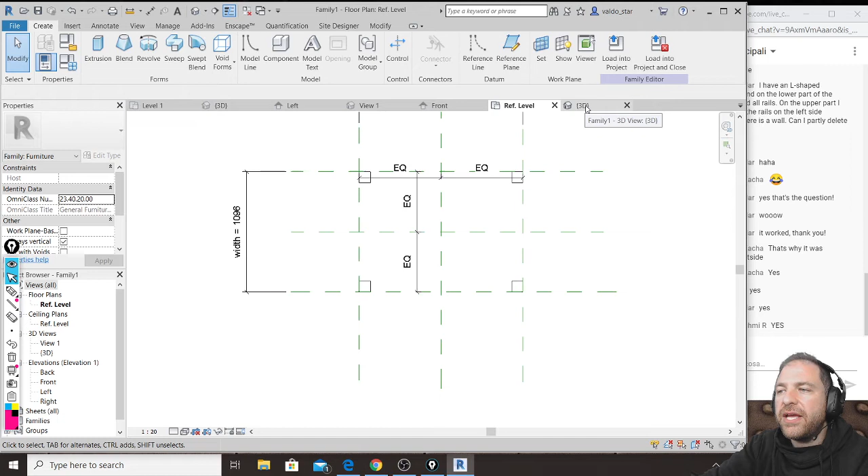Okay? I will make one last piece to the table that is, of course, useful. That is, I will make the top of the table. So I will basically do this. Look, I go to the 3D view, just because I'm unbelievably lazy. I could also make a parametric height, but just to avoid overcomplicating things,

I will set that I want to create my extrusion by picking the top of these legs, so that my top of the table will start from there, and I will make a very simple rectangular extrusion.

Okay? And take care, I'm not that bad.

I know that this rectangular extrusion is not matching sizes of my table, but I don't really need to be precise, because even for the top of the table I have to repeat that process. That is, I need to add alignment constraints. So I go back to my reference level and I click align, reference plane, side of the top, lock it, plane, side, lock it, plane, side, lock it, plane, side, lock it.

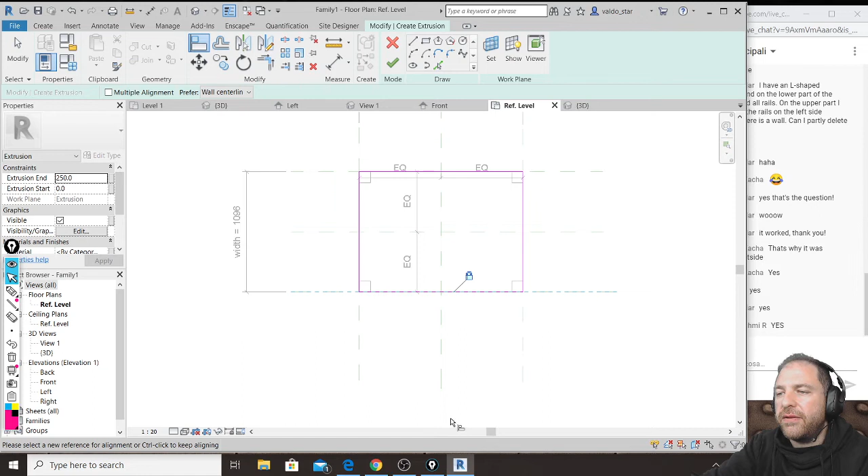I click OK. Now it will be a little bit weird, it looks like a butcher table. I just give the height a more realistic value, like 50 millimeters, and bim, bada boom, I have my table. That honestly could be made in an easier way. I could just make 4 boxes and another box on top, but we are making not only an object, we are making a parametric object that is managed by 2 values that are called length and width.

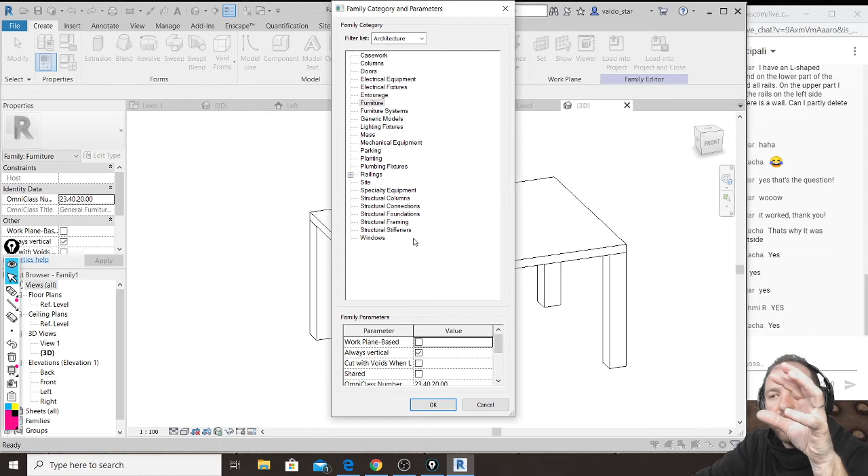Okay? So ready for this? Because this would be unbelievable. What I can do now is, I know that if I go to create and I start playing with these buttons, I will find this. This one is properties, so nothing important. This one changes, if by mistake, let's say, you have created a furniture, but then you realize that you wanted to make a wall, you have to click this button here with this yellow symbol, and you have to choose the right category of your object. Okay? So this is what this button is about.

The one that is a lot more interesting instead is this lower button here that shows you these 4 small cubes. In here you have basically parameters of your table. And this is where the fun begins, because in here you can start typing a new value for length, let's say 700, a new value for width, let's say 2000. You click apply, and if I haven't skipped any step, see what happens to my table. Boom! And my table, in a parametric way, changes its dimensions.

So if I make it 1,000 by 1,000, apply, boom, and it becomes square. And not only can I change it time to time, but I can basically create preset sets of parameters by clicking up here, by clicking New Type, and I will show you what it does. I click New Type, and I call this square. Okay? And I click Apply.

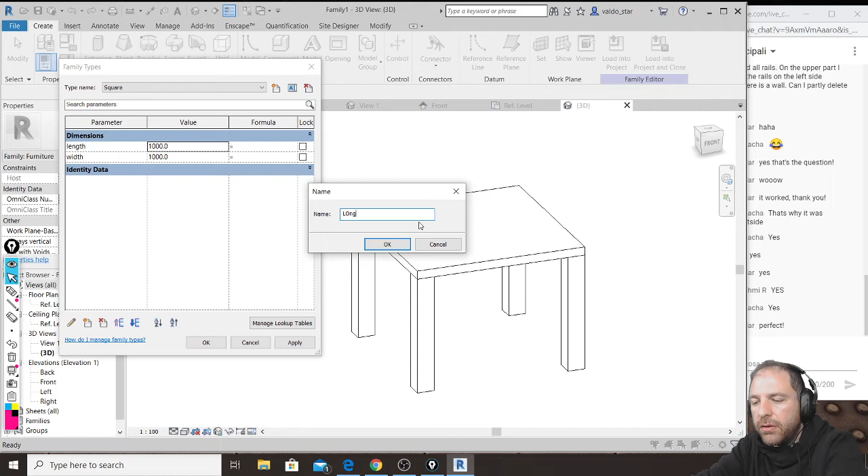Then I click another type, and I call it long. And I will make it, let's say, 2000 millimeters long, 800 millimeters large. And if I apply, it will be like this. I can create as many variations as I want. I will make a new one. I will make it extra long. That would be just weird. It would be a table that will have...

What it means, audio? What it means, audio? Audio. Audio is working. Audio. I mean, I was in the middle of a masterpiece and you said the audio wasn't working.

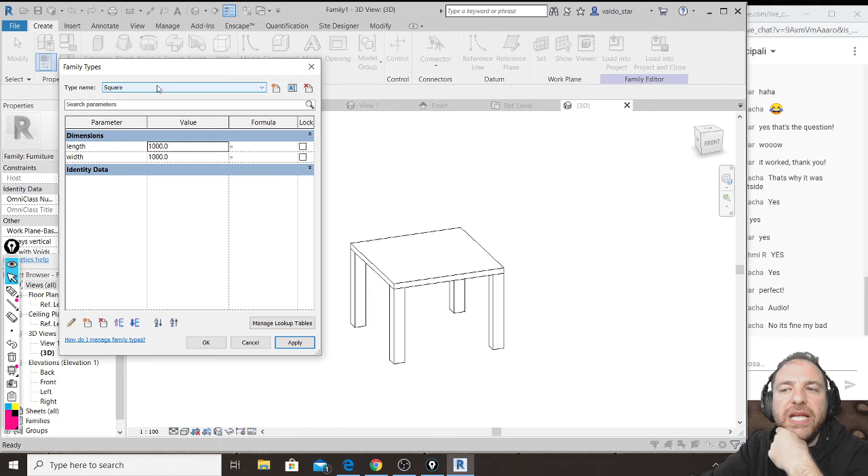So look, what I was doing is I was creating family types. But why? Because now we have these 3 presets, and let's make it 1000, like this, apply. So now, look, just by using one of these presets, I have created 3 variations of the same object inside this family that is my table. And I could add a lot more parameters. I could add material, the height. I could make it very complex, but what is important is understanding how the thing works.

But then I click OK. I save this in my metric library, let's say US metric furniture, and I will call this table so cool table. Okay, so why use this instead of model in place? Because in this way you have saved your object as an external file, and if I close it now, and let's say I use this file where I was working before.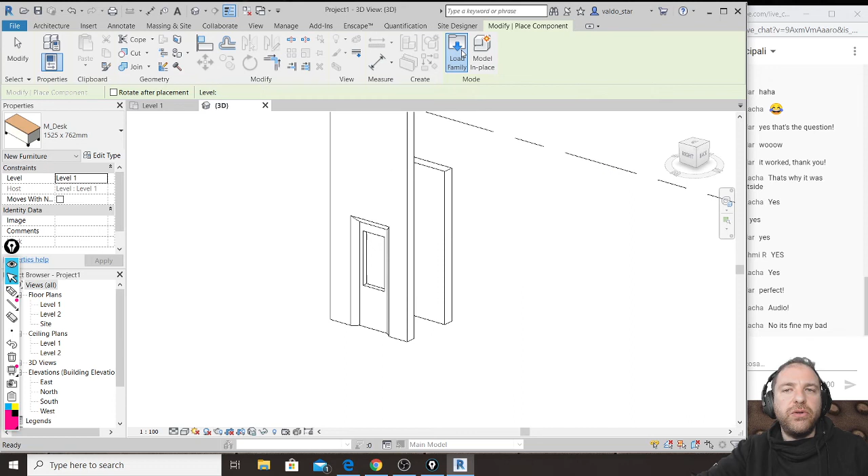Now I go to component, I click load family, I saved my file inside my furniture folder, and I find my so cool table furniture. I can click open, and I will discover that Revit gives me my so cool table, if I click here, in my 3 variations: square, long, extra long. So look, I can populate my project with square tables. I can then choose to use the long one, as well as the extra long one, and I can use and reuse files that I create in this way inside all of my projects.

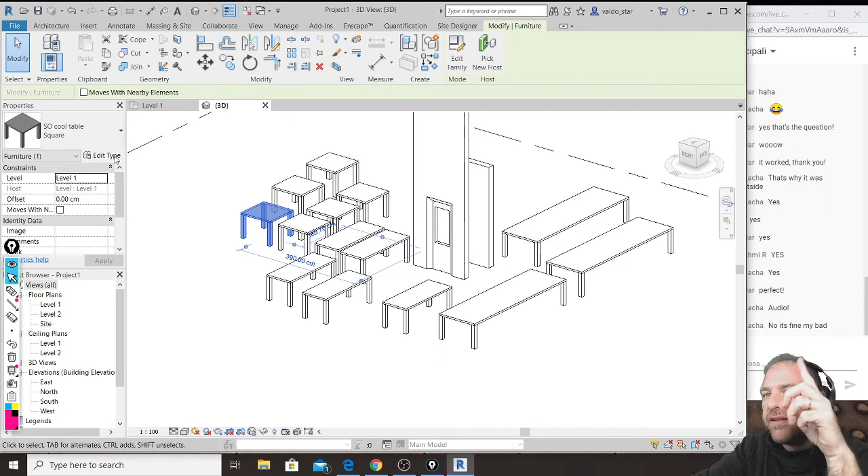As well, even inside a single project, I can edit the type, and only in this project I can make a small variation so that the square will be like 80 by 80 centimeters, and they will change. But in this case, they will change in this file only without affecting the family file that I have saved. Okay? Is that clear? Yes? No? Tell me something.

Perfect. I am super happy. This is a little bit tricky. Also, the more complex shapes you have, the more complex it will be to add parameters. But it is something that you do once for an object in this way, and it will be a long operation at the beginning, but it will save you a lot of time afterward when you have to reuse your objects.

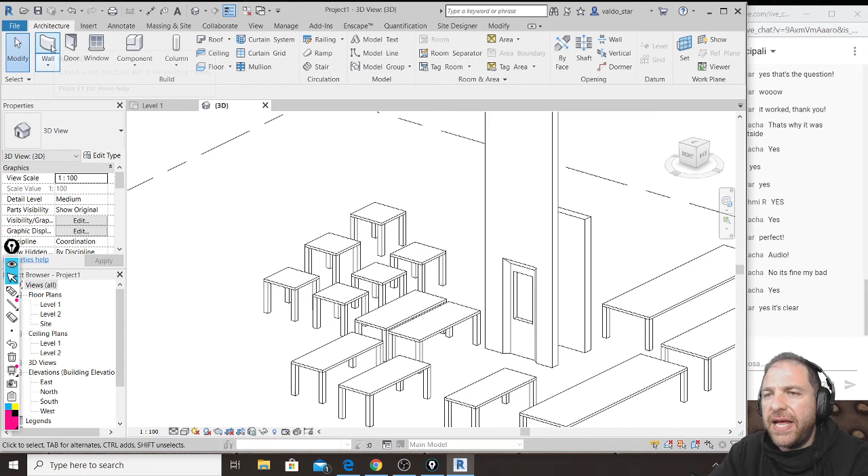So first, let's see the wall. If I make a wall and I want to change its material, I need to understand that there are several ways to do it. Some of them will be easier, some less easy. But if you use certain features, it is simple. If not, it becomes a nightmare. So the right way, the way that really works well to change the material of a wall, is by editing its type, by going into structure,

and by editing layers. So this is, for example, a wall called generic wall. It has no finishing layers. It has only one structure layer here. So if I want to add materials, I should insert a layer. I will move it up first, and give it a certain thickness, let's say at least 1 centimeter. And I have to add a layer underneath, so I will move it down and make it 1 centimeter at least. But the thickness is changing, because now it will be 22, so I will go back to its overall thickness by changing this to 18.

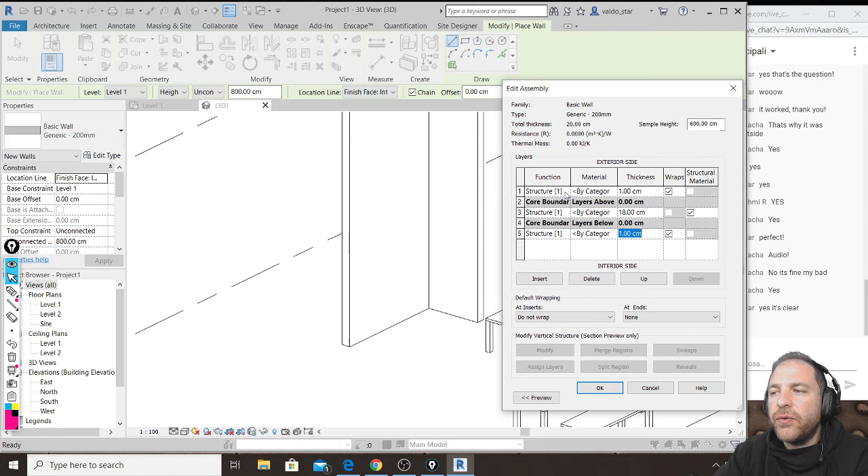And what is important is that if my goal is to change materials, for the layer I've placed on the exterior side and the layer I've placed on the interior side, I have to click first where I see function, and change this function to finish. And if I want two different independent materials, one on the outside and one on the inside, for my other layer I will choose finish 2. This is the first step to prepare my wall to correctly receive materials.

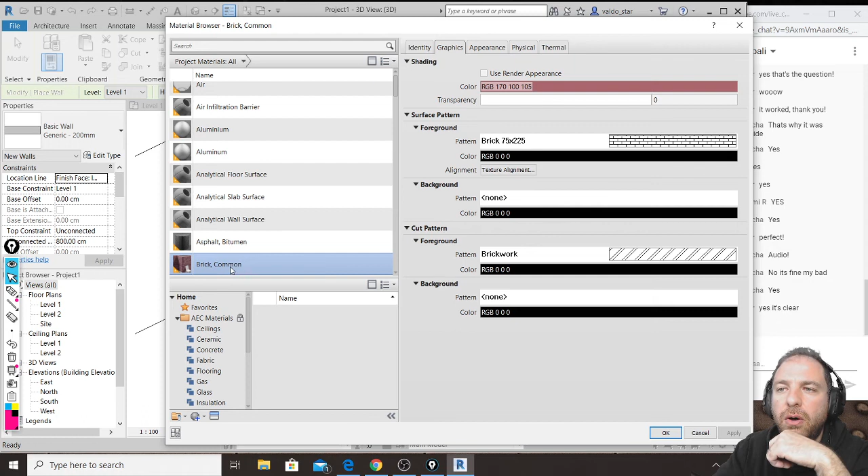Because once I have made this simple first step, next to the function of the layer, I can see the column called material. So if I want a certain material on the outside, I click here. It is hard to see, but there are 3 dots appearing. I click here and wait for Revit to load my material browser. And I can choose from these materials for now. So let's say I want brick on the outside. I select brick in my material browser and click OK.

And if for the interior I want another material, I click these 3 dots on the interior finish layer. I will use something like gypsum, or let's see if there is wall paint. No, I will click gypsum. Okay. Click OK. Click OK. Click OK. And now this wall type called basic wall, that I have already used, all the walls created with this type will have bricks on the exterior face and white on the interior.

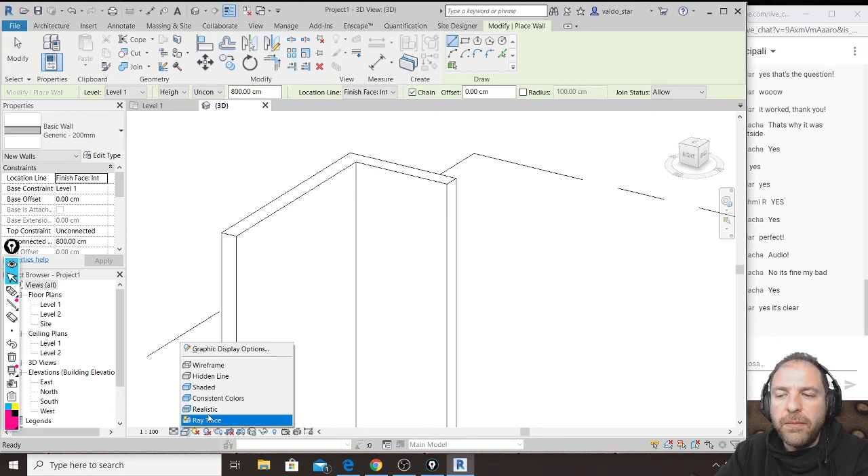If you want to check, you can quickly change your visual style from hidden line to realistic. And you will see that they also have the texture on this side as well. Okay, so this is to start working with materials. And this is true for all the objects already made in Revit. So if you have walls like this, you edit the type, add finishing layers, and change the material layer by layer. But this is the beginning, because there are a lot of things to know about materials.

You make a floor, same exact thing. First, we can try loading another floor type, just to see how it looks. But we will see that if we edit the structure, right now it has no finishing layer, and the floor is even easier than the wall, because if I insert a layer and this layer is the last layer, this is what is visible if I see the floor from underneath. So let's say I make it finish 1.

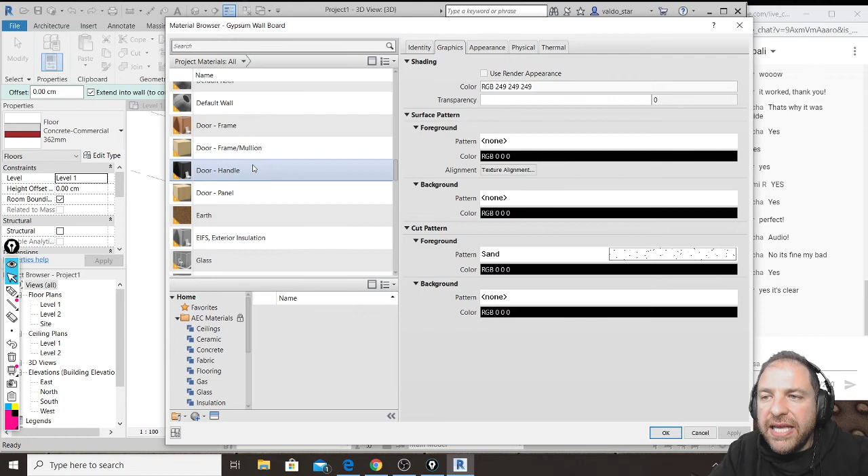If I want to add the tiling, let's say, on top of the floor, I need to add another layer. It has to be another finish, but this must be moved up, up, up. So it has to be the very first element that is visible. It has to be finish. I can click material, and let's say I can try to see if I have nice looking oak flooring. Ooh, fancy. I click OK.

I can't keep this as 0, so I make it 1. So I make one of these 13 just to keep the same final thickness. Layer function.

What do you want from me? Why? What do you want from me?

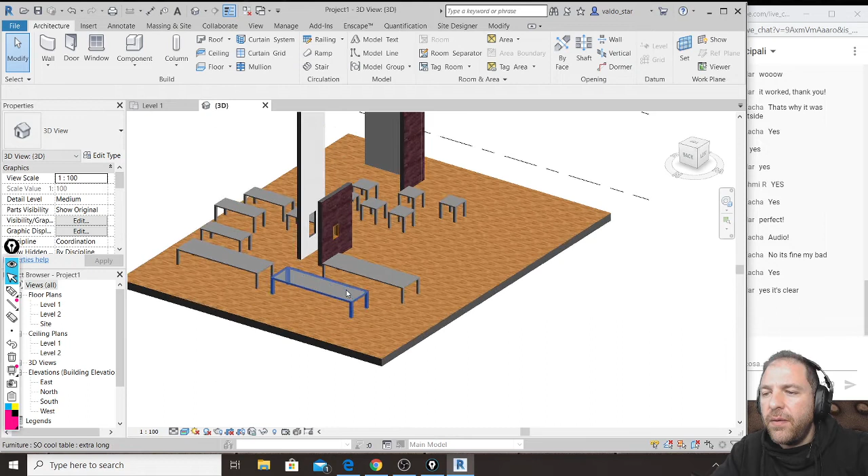You know what? Delete this. Delete this that I don't like. And make these thicker. So, let's say I make this floor. Then, if I use it, let's say I place it here, and I click OK, I will see that my floor will also have the texture.

If you are asking yourself, can we edit materials? Can we use our own texture? To all these questions, the answer is yes, but not today, because it would be too complex and too long, and I don't want to show you this in a couple of seconds. But just one last thing that I want to show you is this. There are objects, let's say like windows or doors,

where materials instead, if you can change them, you need to edit the type, and you can see that there must be a group of parameters that is called material. So you can change it if basically the person who has created that model gave you the material as an editable parameter. So if this is happening, you can change, let's say, instead of the glass panel, you can click glass, and why not? You can make metal, stainless steel.

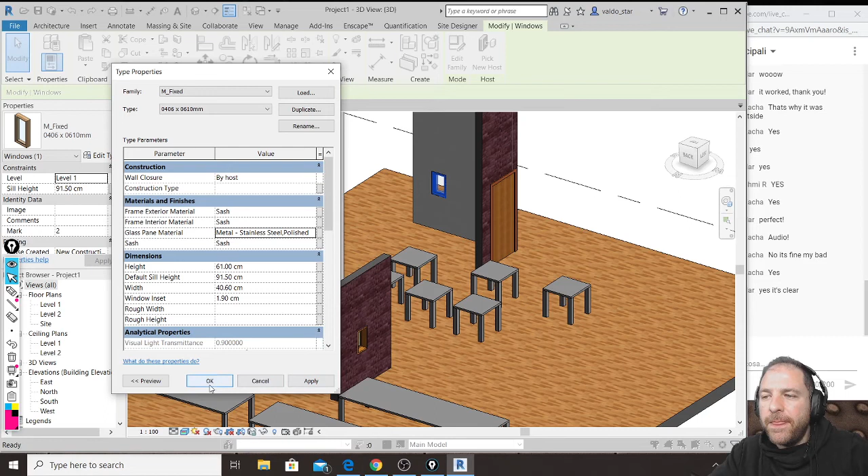So this window, instead of having a glass panel, boom, it will have a stainless steel panel here that makes this like Fort Knox. Or you can change this door. You edit the type, and again, there are materials. So one is for the panel, one is for the frame. You click it, and you can use, let's say, another material. Just using a random one, a purple random material, and boom, it will start changing this. Even for objects, you can change the material.

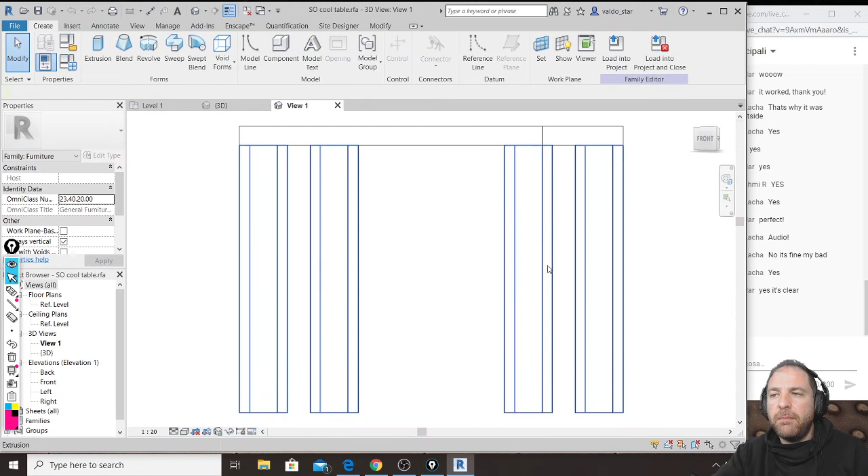The only difference will be, if you remember, I have created this table, and I haven't created a parameter called material. So when I go to edit the type, in here, there is not a quick way to change the material, but even for objects, if you don't find the parameter called material, you can open them by double clicking, and

this is also true even if you make a model in place, but each time that you make a 3D solid, no matter if you make an extrusion, revolve, sweep, whatever, if you want to specify a material for your solid, this is just a property of each solid. So you can change it by changing, let's say, default floor. Boom. Or you select it, you go to these properties, click it, and you make

glass. Technically it should be the opposite, but this will be a table with glass legs. Then you click load into the project and close. Yes, overwrite. Boom! And my tables will have a gray top and they will have these weird looking thick glass legs. Okay? So this is an introduction to materials.

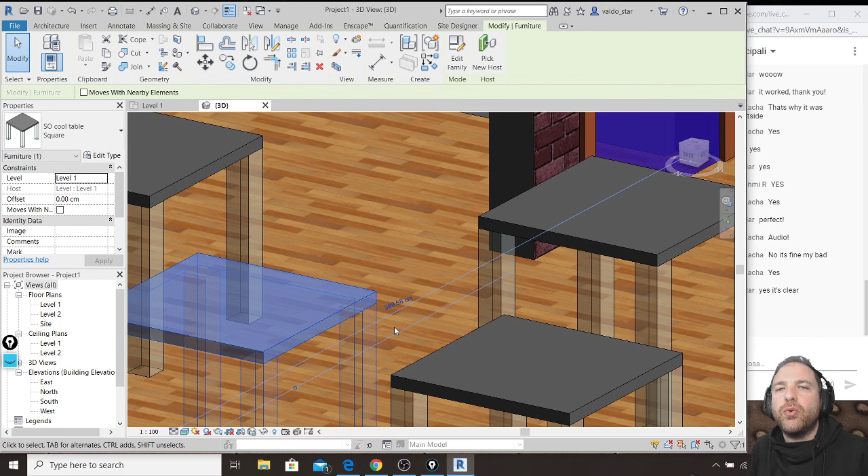You can use materials from the library for this week. Next week, instead, we will jump immediately into the material editor, and I will show you how to make your own materials, and especially how to increase the number of available materials that are inside our project. Okay? Is it clear? Is it fine?

Tell me something, because for me this will be enough for today, and if you have no doubts, no questions, as I hope, we will see each other next Thursday. Perfect! So be so nice. Try to load something into the folder of your homeworks if you have started thinking about your final project, sketching and stuff like that, so that in this long weekend I will check them, and I can also see if there is something more that I can add into my explanation by checking your ideas at least.